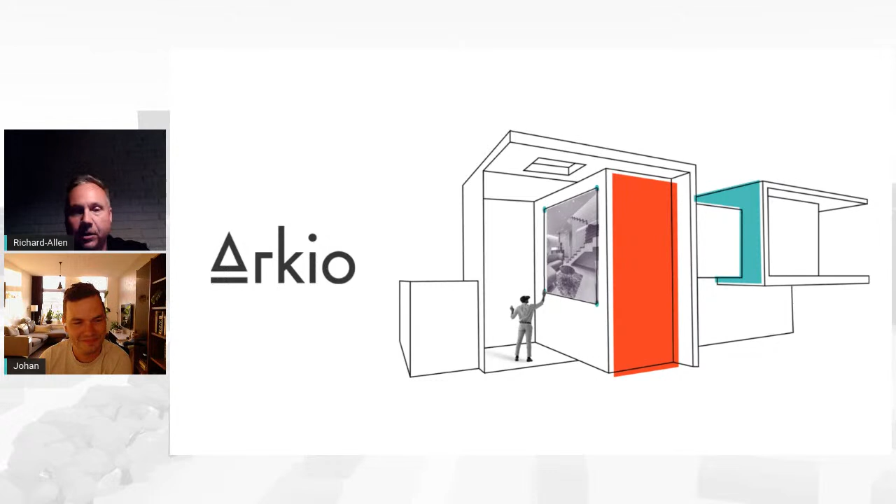Sure, I'll walk through this just a little bit. So a couple of weeks ago, we announced the design competition for Figment HQ to be built out for spatial, built inside of Arkio. Really a fantastic design opportunity for everybody. These were some of the slides we walked through in terms of some of the capabilities of what you can do with Arkio with some of the built-in components, the Unity plugin.

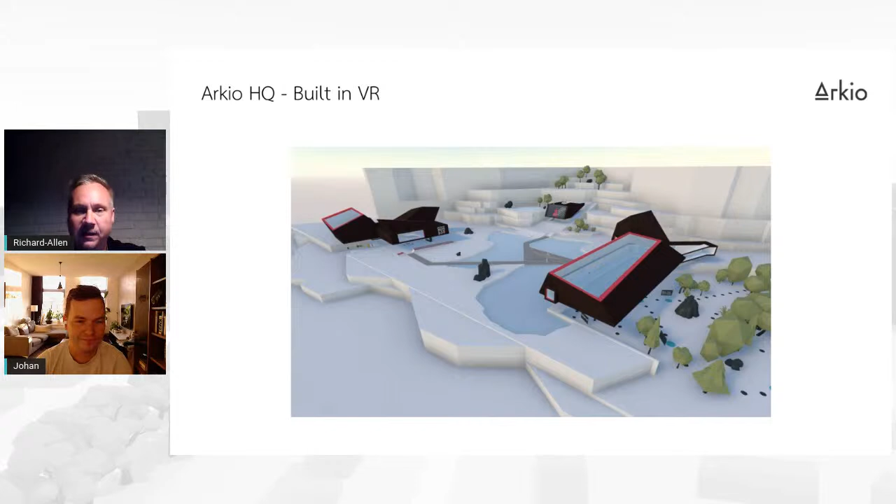Obviously we demoed a bit of Arkio HQ. We hosted an event inside of Arkio HQ, inside of Spatial. I hope a lot of you guys were able to join. If not, the space is still open and live, so feel free to join in. There's some fantastic art exhibits.

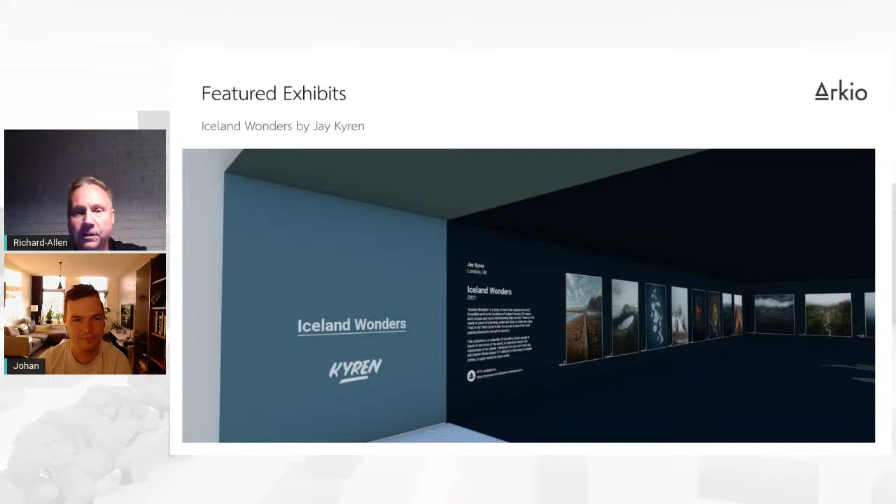This one by Jay Kyren, beautiful photographs of Iceland. All of that is on display inside of Arkio HQ, which is what you see here, live inside of spatial.io. There's the art exhibit by Kyren. We have Pieter Geer Magnuson, he did some wonderful sculptures for Arkio HQ. We've got some user showcase models.

But we made the big announcement about the design competition, Figment, Arkio, and Spatial. What you probably know is the design competition is currently running through middle of August. What you don't know, which I think we can announce - can we not? We can announce it - are the prizes today. So this is the first time this is being announced. Let me pull that up so I can actually get this right.

So first prize is 15,000 US dollar coin in crypto plus an Oculus Quest 2 headset, really fantastic prize for first place. There's a second place prize of 5,000 US dollar coin plus an Oculus headset. There are runner-up prizes, which will include 5 Oculus Quest headsets.

There's a plaque with design credits, and obviously opportunities for blog posts and sharing on socials and all sorts of things. So first time I think we've been able to make that announcement. I think that is coinciding with announcements that Figment is making as well. So super grateful to be working with Figment on this design competition.

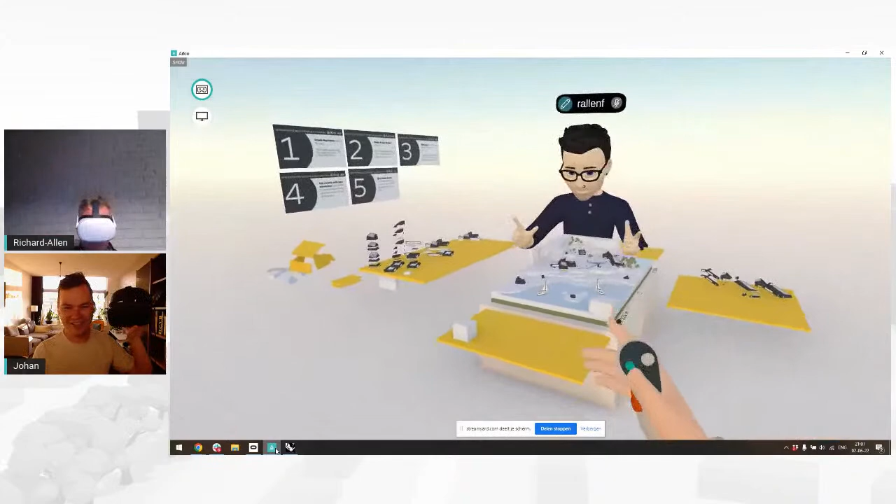Do you see me? Yes, there you are, wonderful. So here we are in the HQ. What are we looking at there, Richard?

So what we're looking at is obviously this HQ model. When you launch Arkio on your main home panel, I'll open that up right here. You can open it up with the main panel. Let me just show the users then. Right there, so you can open up your main panel and jump right into Arkio HQ.

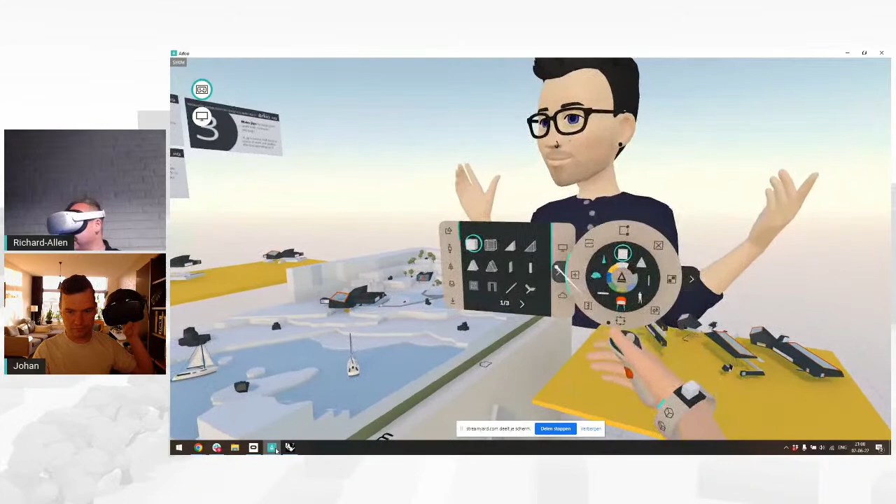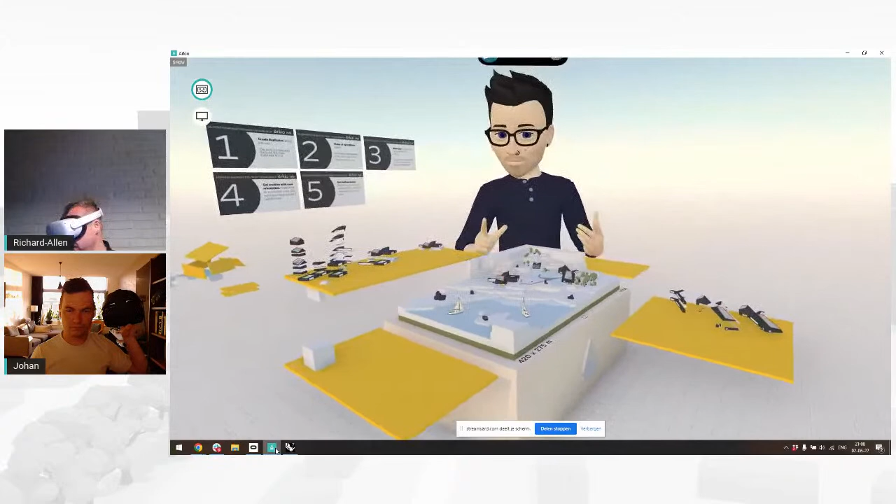Obviously, this space has been - what you're seeing is some of the work in progress for Arkio HQ. I've taken apart some of the geometry so I can show you how some of this was built, some of the methodologies of working with Arkio's unique, intuitive, kind of parametric design capabilities. There's some specific ways you want to work with that, and I think we're going to get into that in just a minute.

I think, Johan, did you want to kick us off with some of the basic building blocks?

Yes, let's do that. So I'm going to be jumping in VR, and I'll try to keep my head still to make it a bit comfortable to watch. But just explaining a bit, going beyond the basics in Arkio: when you're making geometry in the app, you're working with flexible parametric components, and kind of the building system that's in place here. It's good to understand that a bit better so you can make the best use of it.

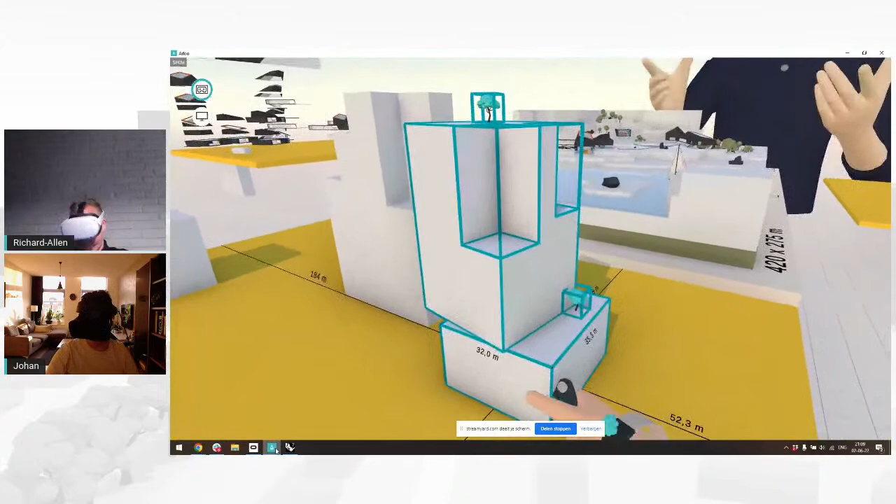So when I'm making solids and subtracting in it, it's all the same. In Arkio, you make either solids or voids by pressing shapes inside of the shapes, and all of the objects that you make behave almost like a physical model. So the best way to work with Arkio is actually using your hands and just picking up the geometry, and you see how it's kind of sliding together, moving and aligning to nearby shapes by just moving them near other objects.

Now these are just basics, but it's good to understand what is happening when objects are glued together like this. So this shape, let me just put a little tree on the top here and here. This shape got all connected at the edges. So when I'm making a volume on another volume, you see how it snaps together at the edges. It means that these faces, when I'm now using the edit tool or my hands, you see how they snap together and move together. So this is the building system of Arkio.

And if you want to move several objects at the same time, this will actually help in your benefit. Sometimes you don't want things to move like this. You can actually twist your hand while you're doing an operation. You can see how the highlight of my controller changes to only move one of the faces. Controller straight, it moves all of the objects on the top, all of the same objects.

You can move the controller with the wrist down to move only one face. And if you do the wrist bent up like this - let me just do it with the other hand so you can see it a bit better - when I move my controller up like this, I can also make only the top surfaces move like this. So you can use this system with your hands to move objects. A much easier way to move things without moving everything at once is you simply disconnect the shapes.

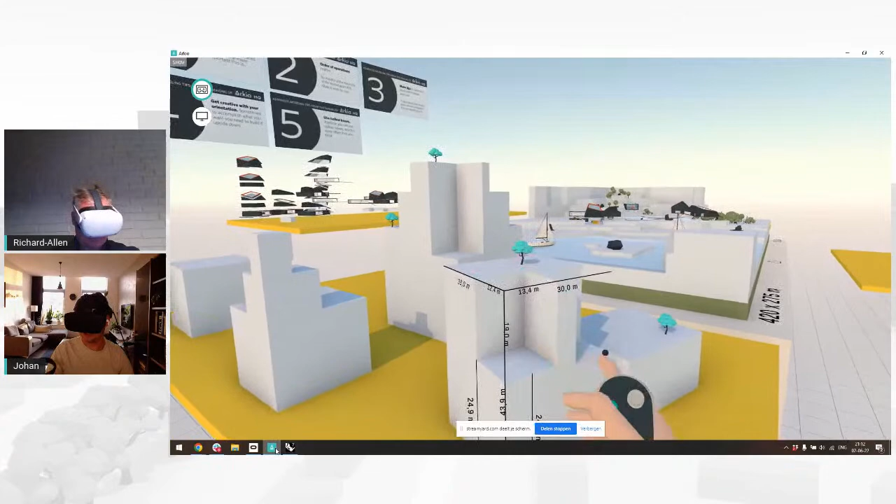There's also some other things I want to quickly show, like when you're making and editing geometry. Basically every operation you're doing in the app, you can also watch your wristband, because this gives you extra options. I could work with orthogonal stretching, which means if I grab this point, it's going to stretch the cube orthogonally. If I switch to free DOM mode, I can stretch the shape per feature in a free form.

Similar different modes are there when I'm switching to a split mode, for example when I'm making cubes, it's splitting the shapes into building floors. And if I cut into those building floors, I can work with tower shapes that have fixed building height.

Now the last quick thing I want to show, but I quickly want to check the timing to see if we're not over.

Can you mute yourself right now, please?

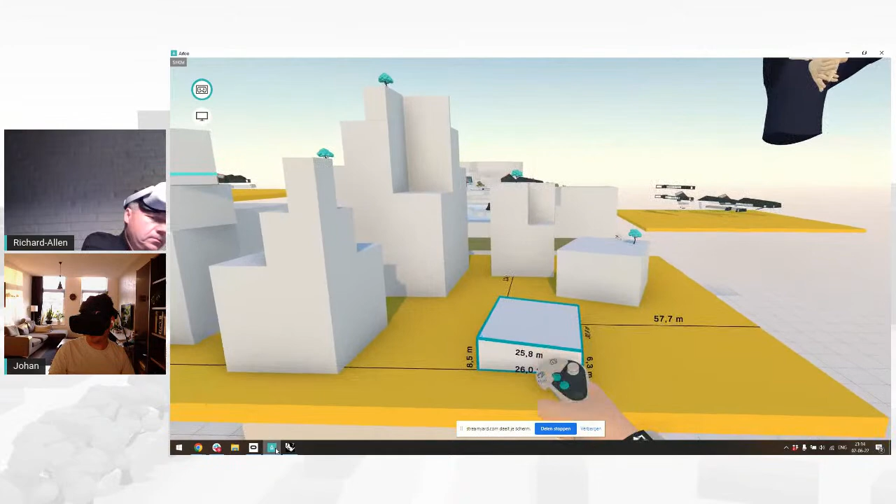So think of this as a block, like if you would make a copy of this block. I'm just trying to get it. So if we have this block and try to make a copy, I'm going to duplicate this in.

You can make the copy, it will snap in place accordingly, and by stacking several of these blocks on top of each other, it will basically make an arc. So these can be seen as building blocks or cubes from your scene.

Let me try to do that as well. I can make arrays of the shapes on top of each other to make a segmented building arch, and this can be used to make more complex shapes with Arkio. So if you want to make more curvy shapes and adjust objects accordingly, you can see how this would give you some extra flexibility when making shapes.

Let's see, Richard Allen seems to be dropping out of the meeting. Are you still there?

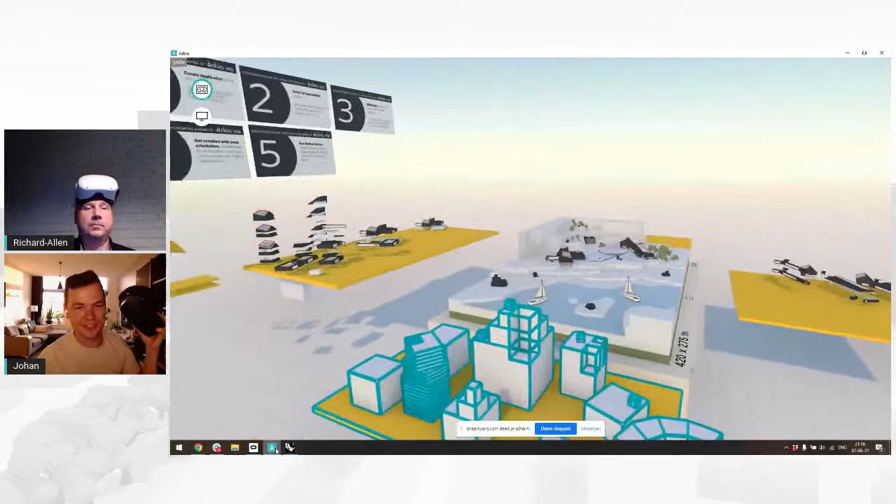Yeah, so I've run into an issue, Johan. Maybe this is okay for everybody to know, but my headset re-updated to the new software version, so I'm not seeing your model inside my headset. I'm trying to re-downgrade to the same version. I think it's probably okay for people to know that sometimes if you're trying to work collaboratively, you need to be working on the same version of Arkio.

Yes, that's good. We gave you access to some developer builds, so it was unintentionally updating for you, but this is indeed what happened now, so your version got out of sync. What we could do is, if you manage to get it still working, you could still show us around in the scene, and I can do the operation for you, so people can still see what is going on.

Okay, let me come back into the room real quick. I was trying to come in another way. We had this working just a couple minutes ago, and then while I set the headset down, it updated itself. Oh yes, nice, love it. Okay, give me just a moment, I'm coming back in the room.

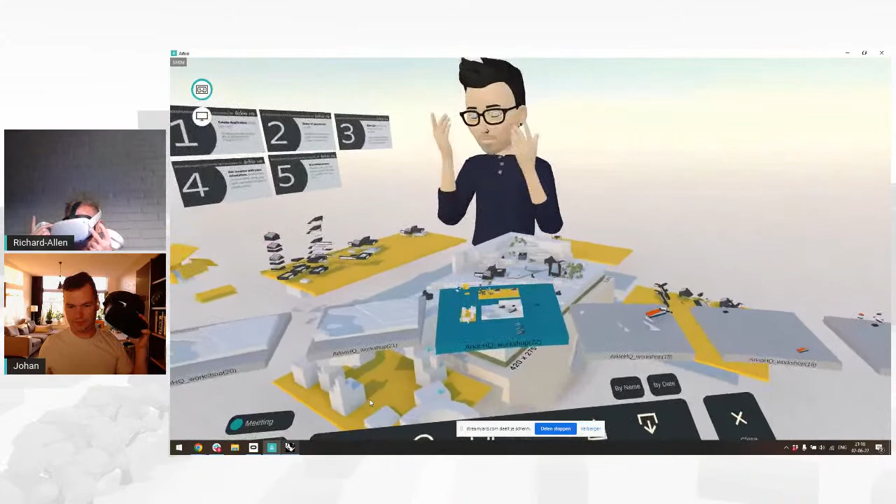Okay. Yes, I think that's fantastic. And I think what I was going to try to walk through, and we'll see how much I can do. So you can see me. Yeah, I'm watching myself on screen. We'll see how much I can interact, and you can see me interacting with things.

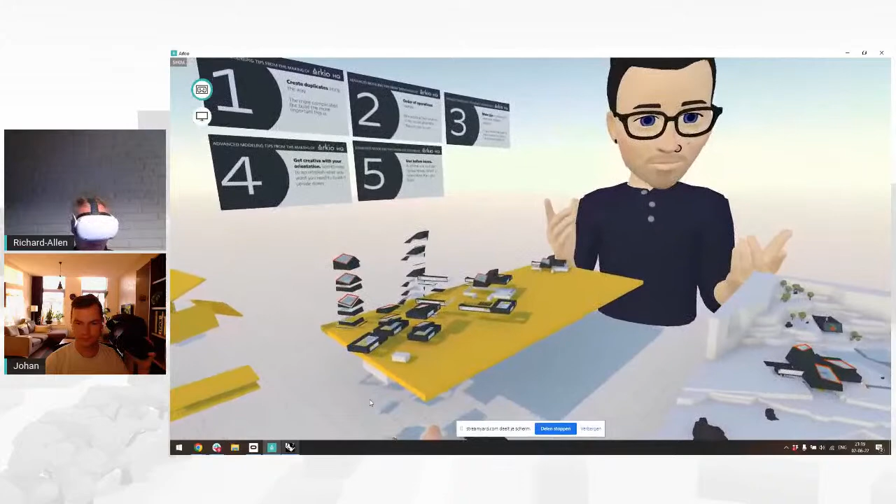I really wanted to talk about, I guess, five points that I learned in building Arkio HQ that I thought would be really advantageous for all of you in getting in and building with Arkio.

So the first one is pretty basic, but it is so very important, especially when you get in and you start building with really complicated geometry inside of Arkio. And that's this idea of creating duplicates.

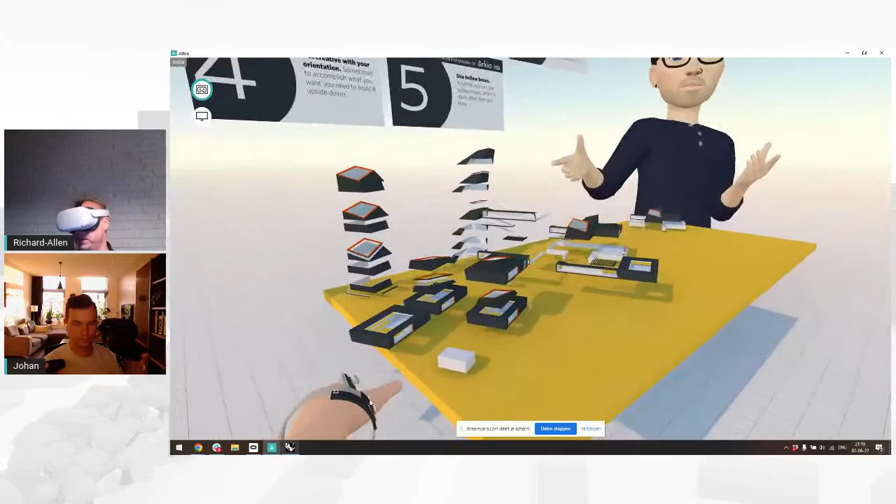So what you see over here on this table is a lot of how I built Arkio HQ. As I would build different components, I would create a duplicate and then start working on that.

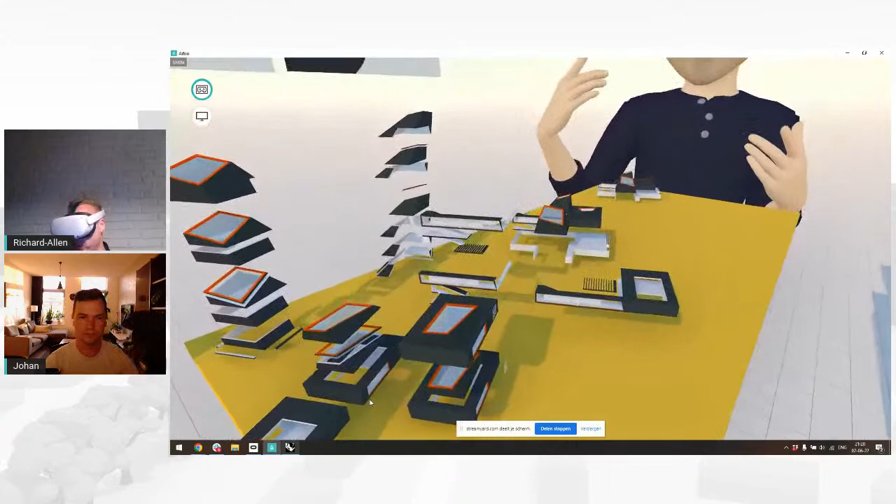So in doing that, you are oftentimes going to break geometry. I have broken a lot of geometry inside of Arkio when I was building Arkio HQ. Some of it is just the nature of trying to kind of figure out how to build something. And you want to be able to go back. Sometimes undo doesn't get you where you want to go. And sometimes undoing, you'll end up losing work that you don't want to lose.

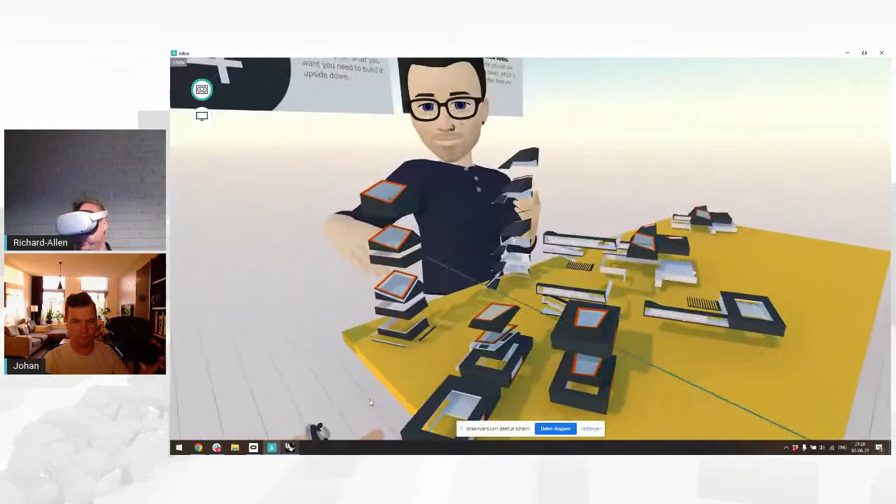So I find it extremely valuable to create a series of breadcrumbs for yourself. And that's what I've done. As I build Arkio HQ, I built it with a series of breadcrumbs that I could always go back to a previous state and work from that, or bring that back into my workflow and continue going. So it sounds basic, but it is extremely important. It will save you a lot of headache.

The second idea is order of operations. Let's see, it's not going to let me move this. So that's one of the things that I don't have—I can do it for you.

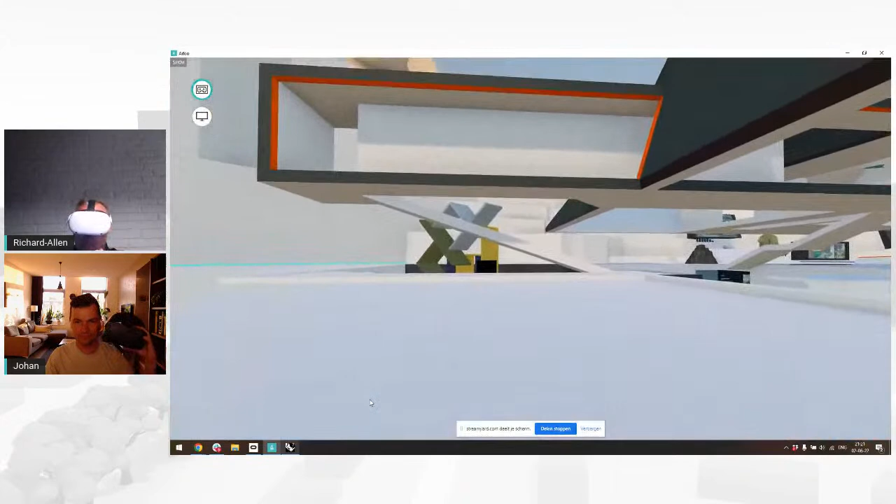Okay, so yes, order of operations. Johan talked a bit about how the geometry is hosted and how you can move things. As you start to build really complicated geometry, I think it's really important to think through how you are hosting things in a very intentional way, because you want to be able to move things out of the way and basically treat an object as a full object, right?

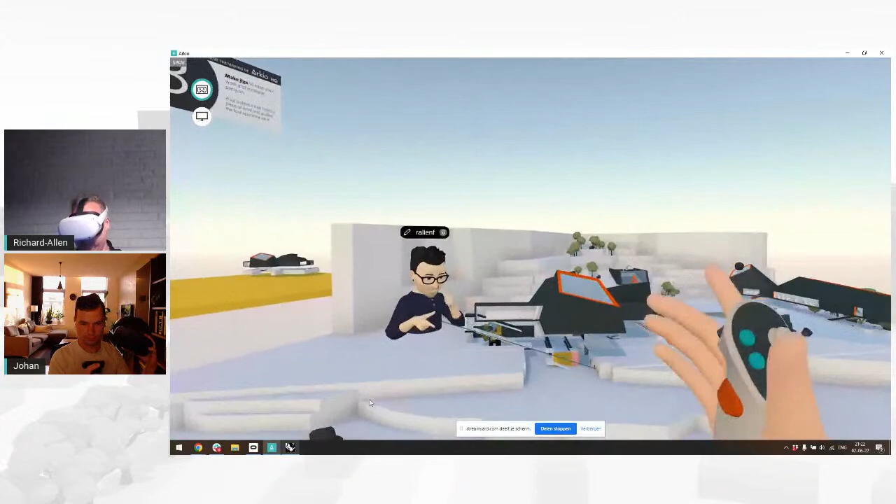So here you see kind of a bit of the pieces that goes into making the gallery building inside of Arkio HQ. Johan, if you will grab this spot right here, this landing, all of the HQ gallery building is hosted on this single landing, because this was the point in which I could locate it on the site model. So it's very easy for me to kind of pick this up and bring it back and leave the whole model kind of connected together.

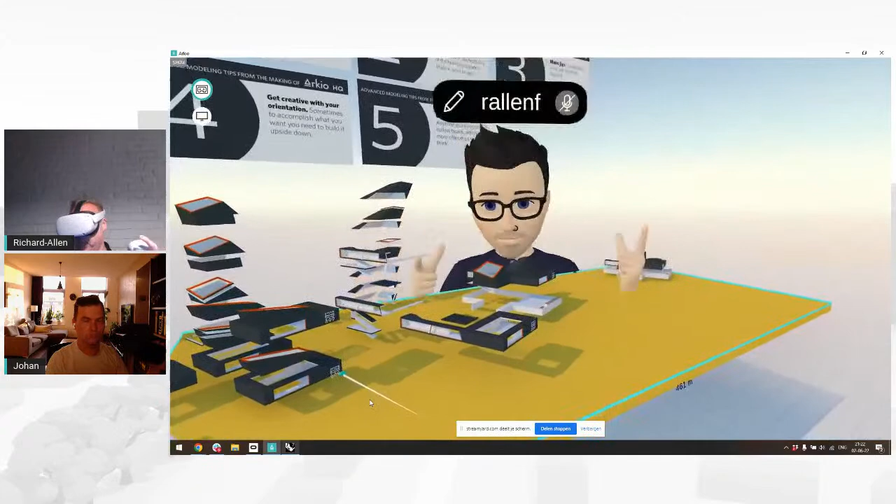And there's a series of hosted geometries, right? So within that point right there hosts the entire model, but there are a series of smaller pieces hosted on top of that. And each of them have a control point that I intentionally kind of placed. And some of it's trial and error. You kind of build something and then you go back and realize, okay, this is the way I need to connect them. This is my order of operations so that I can disassemble and reassemble things. So that is my number 2 tip, really, really important for building complicated geometry inside of Arkio.

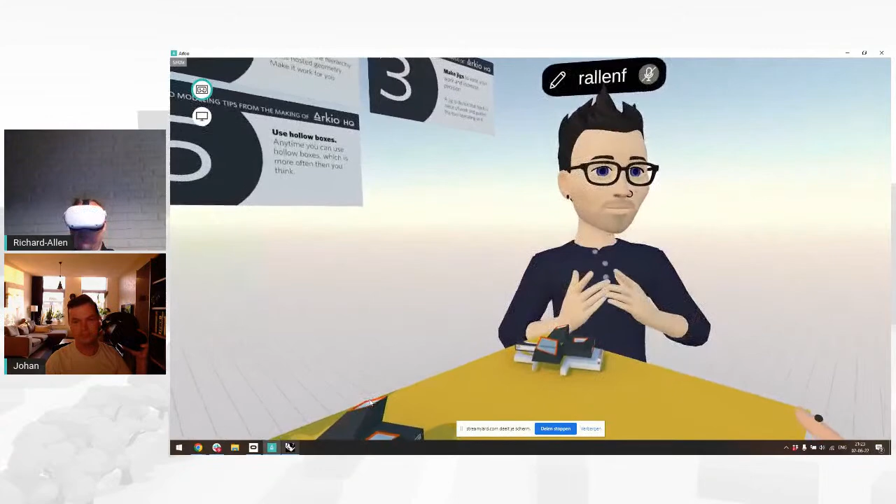The third tip goes back to what Johan talked about, building with your hands. You're building inside of Arkio like you would build a model by hand. For those of us who went to architecture school or have built things in a wood shop, you get used to building jigs. You build yourself tools that help control the geometry. So that is my third tip: make a jig.

When you figure out the geometry you want, you want to be precise. I'm an architect, I like things to be really precise, to be really specific with the way I build and the way things come together. So over here, in this yellow area, you see a couple of the types of jigs that I built.

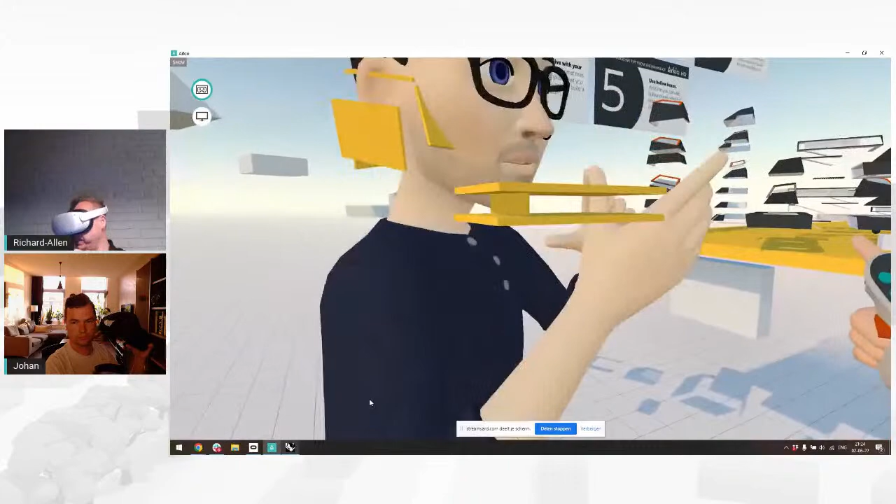These jigs were specific to the gallery building in Arkio, and I've built a number of jigs throughout the process, but these here are specific to the gallery building. This one that looks like a sandwich was a jig specifically for making sure all my walls were at the same height, I think 10 or 12 feet. It corresponds with this slab building right here, so everything within that zone I wanted to be exactly the same height.

I would use this jig and smash my architecture, like I'd build a wall and slide it up there and smash it into that, just like Johan is doing right there. That's how I was able to reproduce the geometry over and over again. A lot of this goes back to the way I would build a physical model in architecture school, building myself the tools that would make that work easy and reproducible.

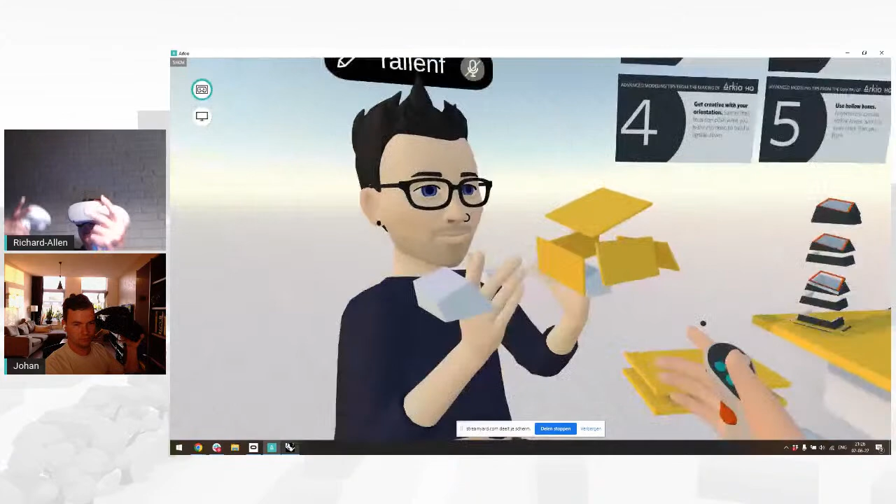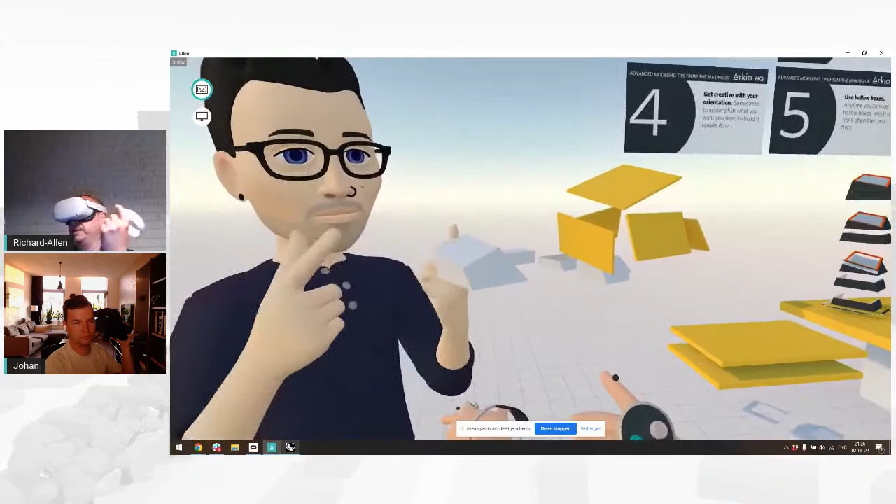So that's making a jig. Another type of jig I would make, you see right here, I've got these angled walls. I really wanted the skylight oculuses to have an interesting shape that was looking up towards the sky. It was inspired by a couple ideas: one, the volcanoes of Iceland, hence the dark color and general shape. It was also about creating skylight moments looking up towards the amazing aurora over the skies of Iceland.

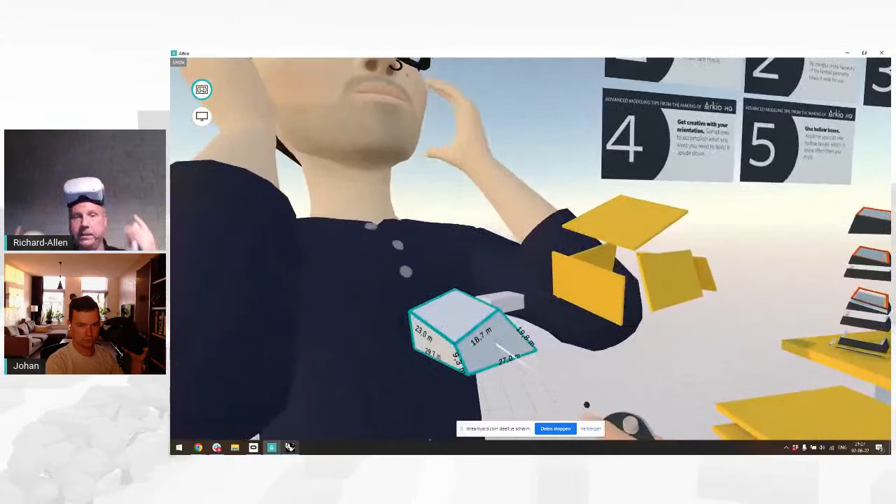So I really wanted that to open up the galleries to the night sky, that was part of the inspiration. How would you build that, and how would you make it really reproducible? What you can see here is I started with a hollow box, which is really getting into tip number 5, but that's okay. I created a hollow box, let me see if Johan is doing that. Yes, and then with that hollow box, I can walk you through this, Johan.

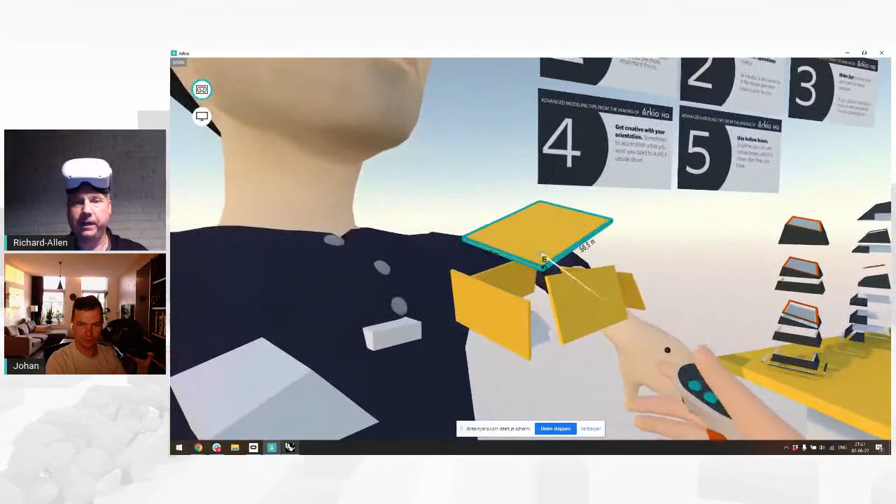So if you build yourself a hollow box, maybe just on one of the yellow platforms, you've got an empty hollow box with 5 sides to it. I would build it maybe on one of the flat ones. If you pull back just a little bit, maybe on top of that jig, build yourself a hollow box right there. If you take that hollow box and move it inside the jig, so it's just sitting inside.

Now edit the walls, edit one wall and smash it up into the roof, like this, and the other one too. The one thing you do have to notice, what's really important doing this, is that the shape you're smashing into has to be bigger than the shape you are smashing, so you almost have to be kind of smaller. But that shape you can now smash into those walls and get that open, hollow volume with some interesting angles to it.

So basically what we're seeing here, this gives me the shape inside, just using that little jig that was made. We have that very specific shape, and you can see from the inside it's actually a hollow shape. So this is how you made most of those elements, right? You kind of forced the geometry to follow the exact planes you already set.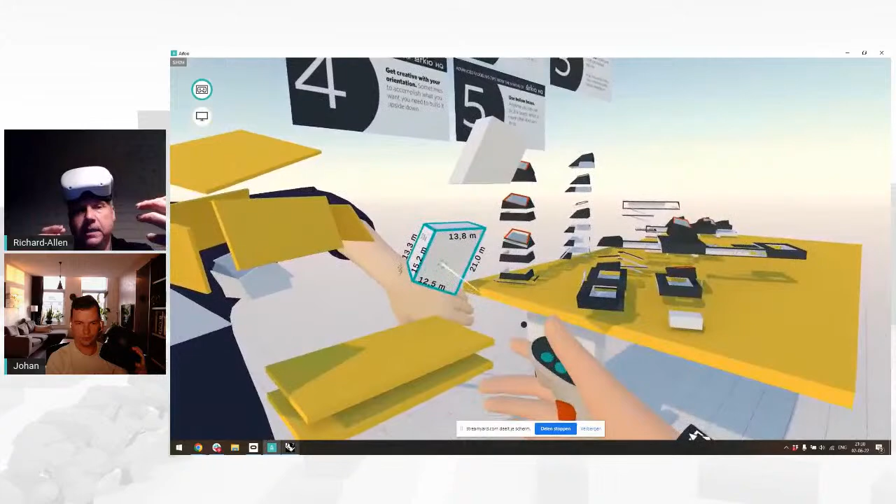So you need to turn your model around, right? If you look at this, you might want to slice it at an angle. That's exactly what I did when I cut up those skylights - I'd slice them at an angle. I built myself a new jig that would allow me to rotate the model at a precise angle, and then at that angle I could slice that geometry. Then you build yourself a number of jigs so you can bring it back.

And put it in the original orientation. So it's something you have to think through - you have to think a couple steps ahead when doing some of these processes. You need to be able to rotate the model, slice it, and then rotate it back to where you want. But what you find when you do this is that the geometry is precisely built and lined up.

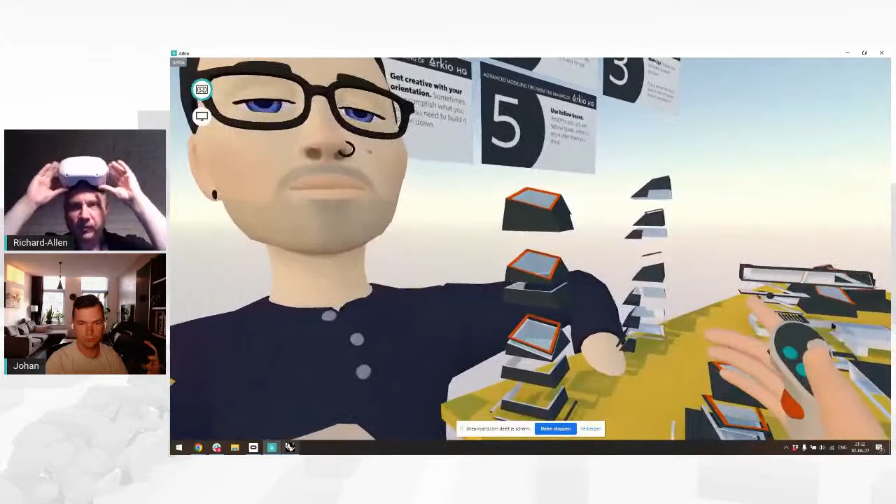So you can then take, for instance, this piece right here - I don't know if you can see me. I've taken this top piece, this was sliced off the whole. This lower portion I rotated 90 degrees, sliced off the edge, because that's the portion that actually engages with the art gallery. The rest of it is kind of an oculus. I'd sliced off the very top, so I got rid of the top box, the lid for the hollow box, and then I sliced a tiny little sliver off of that, and that's what becomes the red ring.

So it's a series - it's one piece of geometry that I've sliced a number of ways and reassembled. And then when you put it all together, it all lines up precisely.

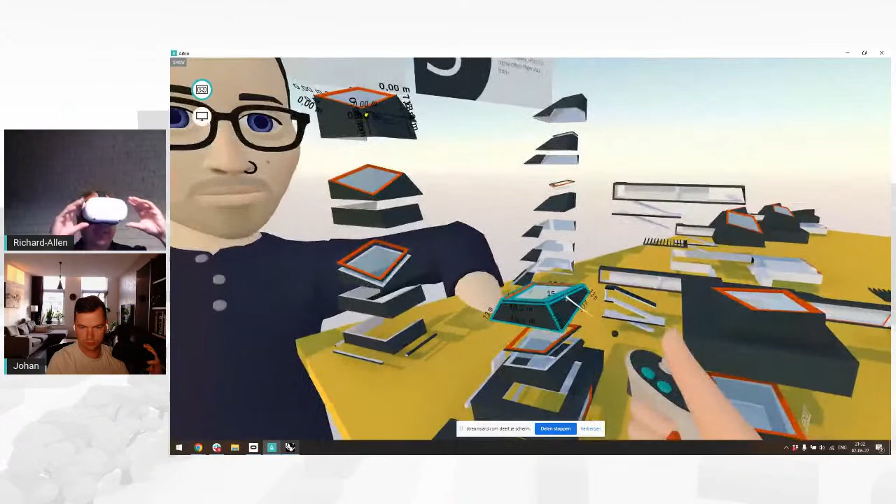I think for me this was one of those tools that became really, really advantageous - the hollow box, so that's tip number 5. I use the hollow box a lot. I find if you can build it with the hollow box, your construction is going to be better in the end. You're not going to have a lot of times when you're building and the way it hosts geometry, where you carve away and end up not being able to place something in a spot that's been carved.

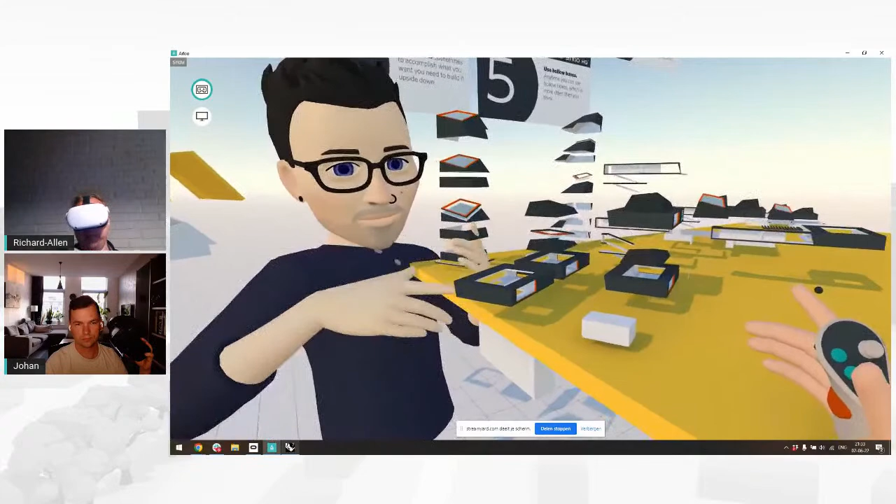So if you build it with a hollow box, it's a whole lot easier. I want to point out where I've built hollow boxes. All of the skylights started as hollow boxes. This volume right here, which was the main rectilinear box for the gallery, that is a hollow box. It's a hollow box that I sliced off - actually I built it vertically, then rotated it 90 degrees, and sliced it at an angle. Then you come in and start carving out of that. So fairly simple, basic hollow box.

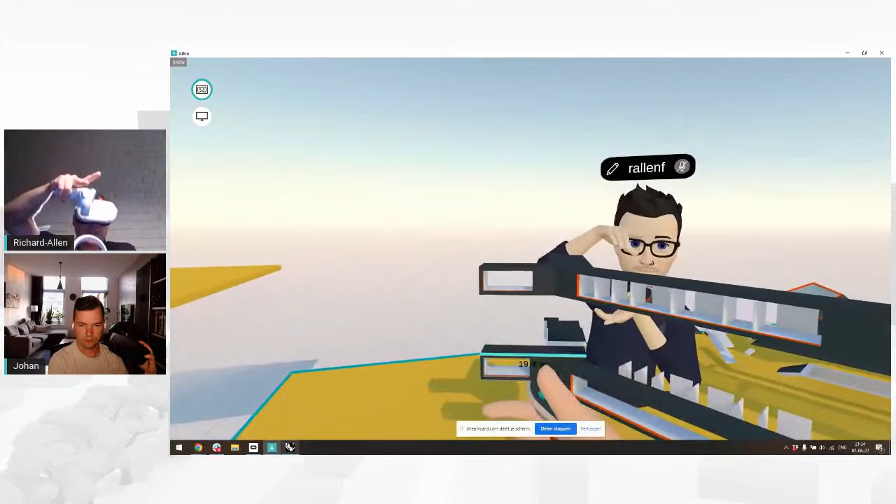If you follow me over to this front table, a lot of the geometry for the learning center were hollow boxes. The top, obviously, the skylights again were hollow boxes. All of these elements that protruded out and created office spaces, meeting room spaces, and those sorts of things, those were also hollow boxes. Those were hollow boxes that I had created a jig for so I could make sure they were all the same height, again 12 feet, so they all lined up exactly perfectly.

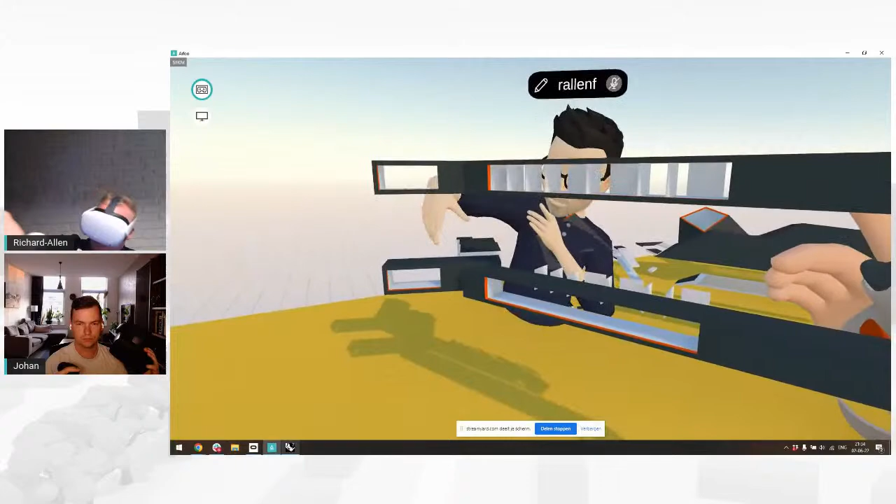And then just by creatively slicing off elements - this box right here, I had sliced off two sides. This one has multiple sides sliced off. So it looks like at the end of the day this is just 3 walls or 3 planes, but it's actually just a hollow box that I've cut off multiple planes of.

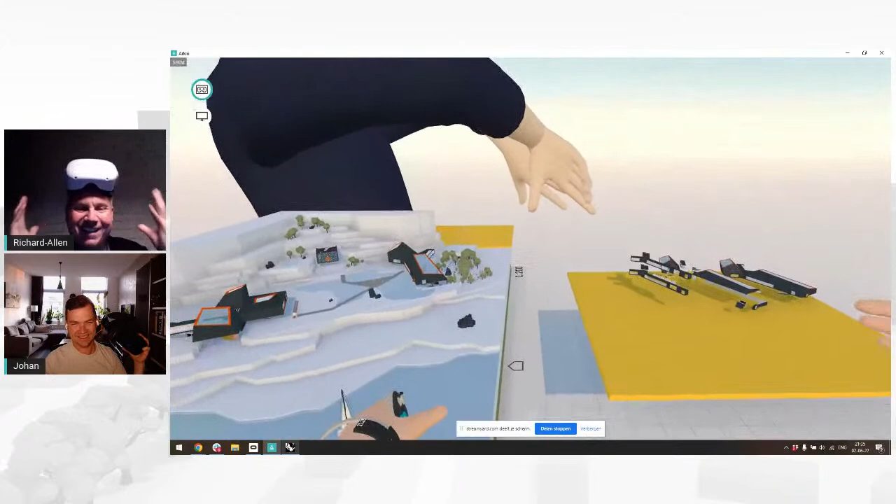And it's more stable, less geometry than if it were 3 separate planes. I think those are the biggest tips that I wanted to share with you that I learned through the process, which made my workflow a whole lot easier. I appreciate Johan for building along as I walked through it. Hopefully it's made some sense.

Are there any questions? I think it's very good to show what you were talking about with these boxes - they use Arkio's parametric nature very well. You can see how the geometry still stays flexible even though the walls stay the same thickness. So you could really use this to make more sculptural slabs like this, still with a fixed wall thickness.

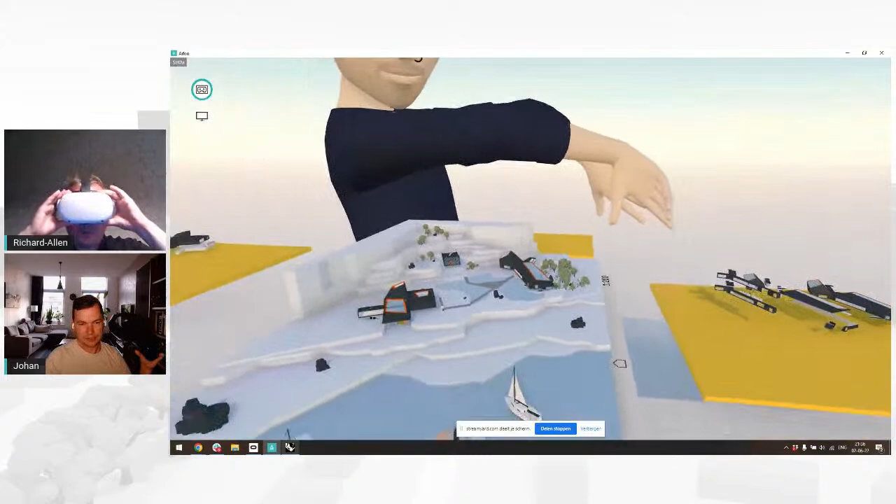So tips 4 and 5, let me go back and look. Tip 4 was being creative with the orientation. Sometimes what you want to build, you need to build upside down, or 90 degrees from top, so that you can use the slicing tool. Just because the slicing tool only cuts horizontally doesn't mean it can't end up cutting something at a funky angle - you just have to build yourself a jig to do it. Think about using a table saw: the blade only usually cuts one way, but if you build yourself a jig, you can cut that geometry any way you want. That was number 4, be creative with your orientation.

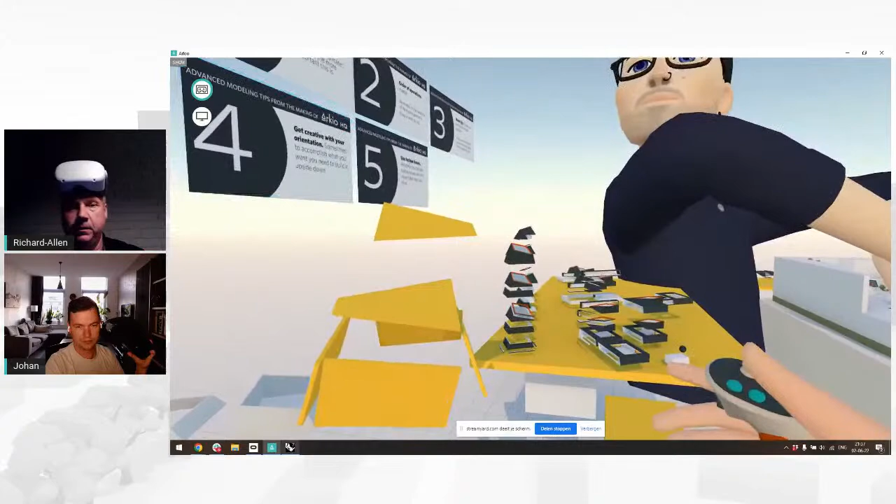Know that sometimes to get what you want, you have to think about it a different way. Number 5 was using hollow boxes. As much as you can, if you can think through how to use a hollow box, that would be my biggest recommendation, because it simplifies the geometry and allows you to nest other pieces into it a lot easier than if you start carving it away.

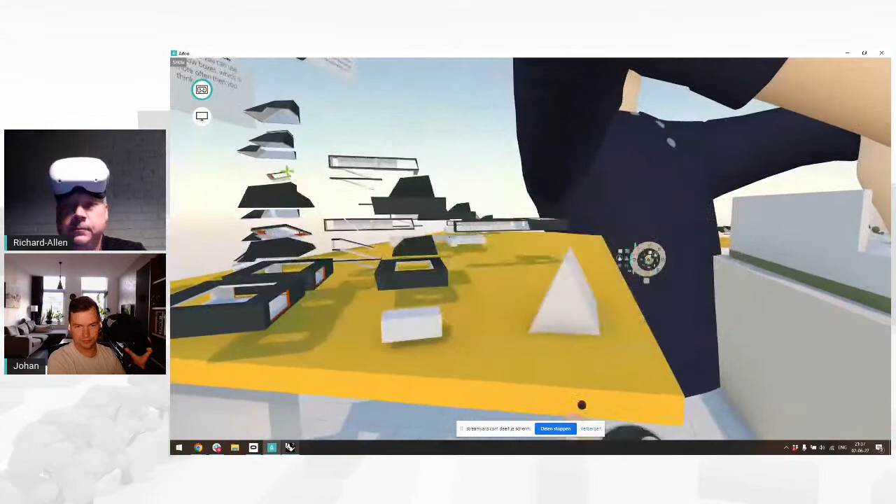Some other tips I can give, maybe while you look for questions about the steps - if you have an Arkio solid geometry, sometimes when I'm making a shape on another shape and dragging it in, it's not orienting the way I want. I want to cut a triangle in this triangle, but it's orienting the wrong way.

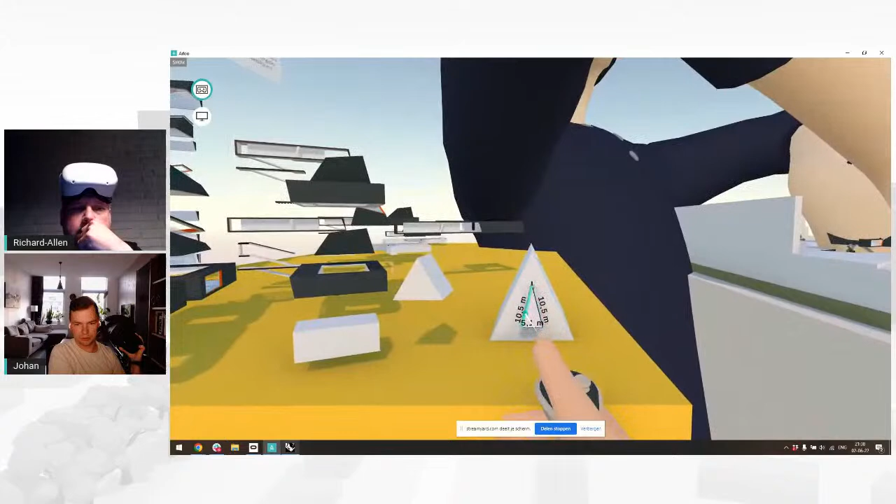Also adding to that tip of orientation, the rotation of the shape can still be adjusted. You can pick up that object and use the edit tool, and maybe some jigs, to make it more precise, forcing that solid shape into a hollow shape. So you could use any starting shape you have, just make it a solid, and convert it to a void by pressing it inside of another solid shape.

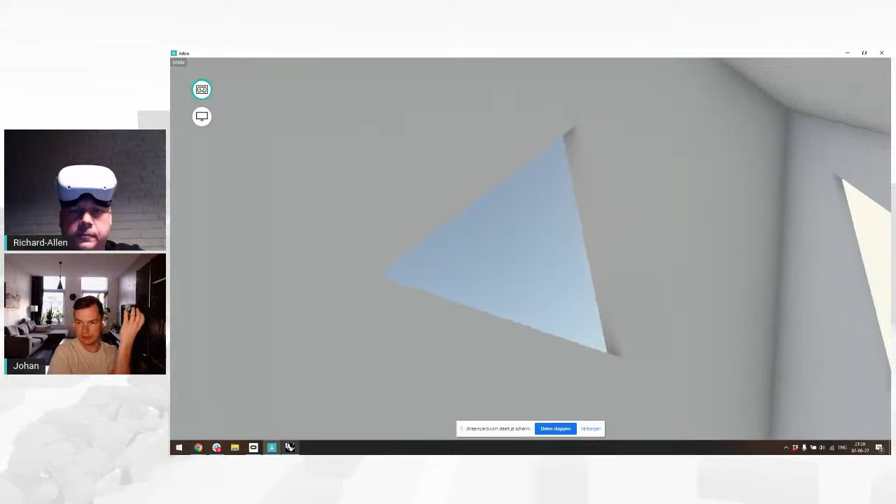So here again we see the advantage of the hollow shape - it stays parametrically with the same wall thickness. I can jump inside of this space and really see what that space will already look like. So you can imagine, with some simple primitives, you can already build some pretty interesting, architecturally interesting spaces.

In the meantime, I can check some of the questions as well - do you see some questions, Richard Allen? There's one question about a recent update in camera jittering. Is that something you're aware of?

We are using application space warp with Arkio - I don't know if you're familiar with some of these techniques, but we're basically rendering at half the frame rate. Typical VR apps run at like 70 or 90 frames per second; we run at half the frame rate. So we have more computational power to load bigger models and have more space for our rendering engine. You might sometimes see a bit of jittering on things like your avatar - if your avatar goes out of sight, you may see jittering, and there are also some artifacts with the UI. We're aware of these issues and trying to fix them in the next updates. But if you see very specific issues with jittering or uncomfortable experiences, please let us know, because it might be related to this application space warp we're using, and we could look into finding a solution with you.

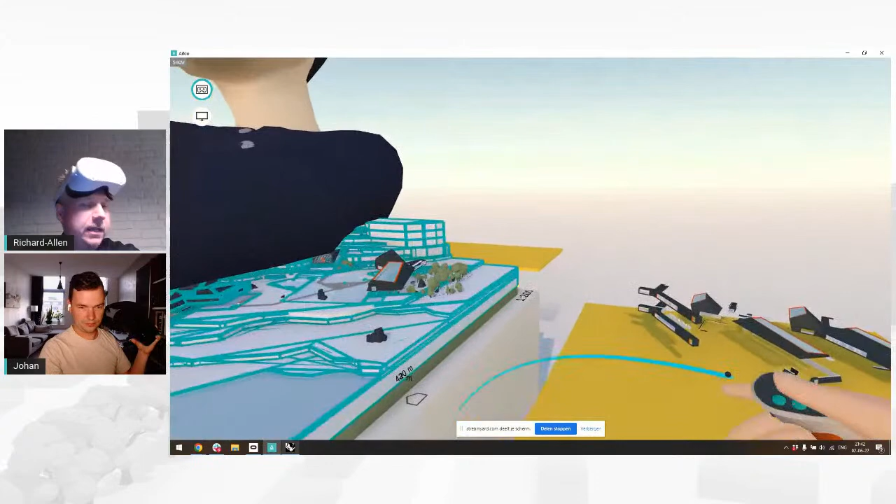Diana, you asked a question about publishing in Spatial. We did a webinar about two weeks ago, live from inside Spatial, where we talked about that process. You can export directly from Arkio to a GLB file, and that file will import directly into Spatial. So it's super seamless if you want to go that route.

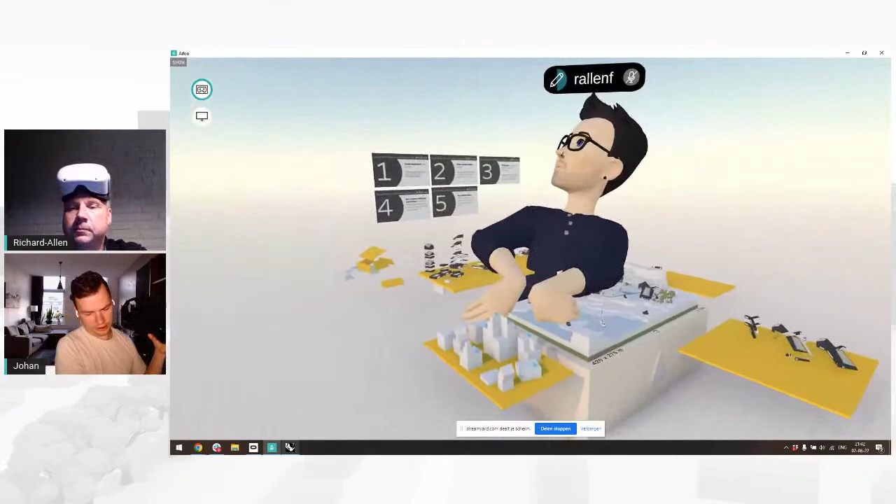I think we have a recording of that, and we can share it again on our Discord if it's available, with some of those tips and processes. We have a basic introduction, or the basic steps needed to get things from Arkio to Spatial, on the Arkio website in our support page. That's where you can find the steps to take something to Spatial with minimum effort.

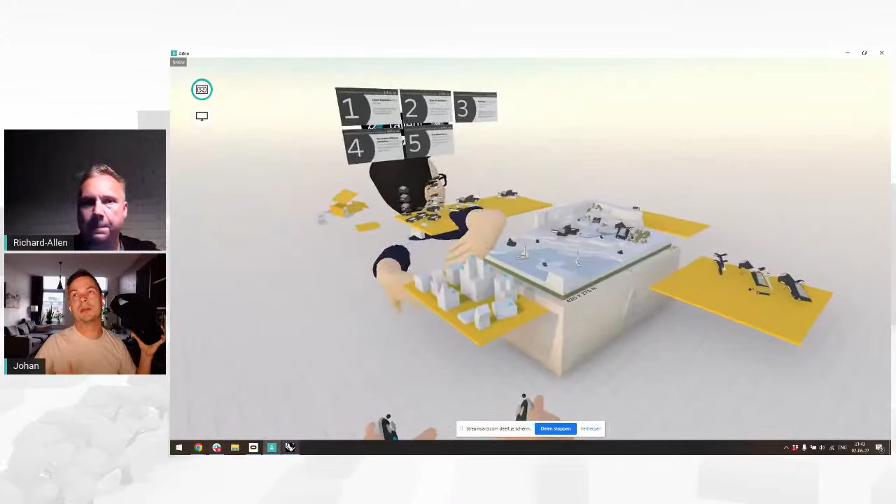We are also going to document a bit more some of the additional edits you can do to make your scene look better in Spatial with some light baking. That will be coming in the next few weeks where we'll add more info. Also, the guys from Spatial have really interesting help pages on this, some video tutorials. I definitely recommend checking Spatial's website if you want to get into light baking and more of the scene preparations outside of Arkio.

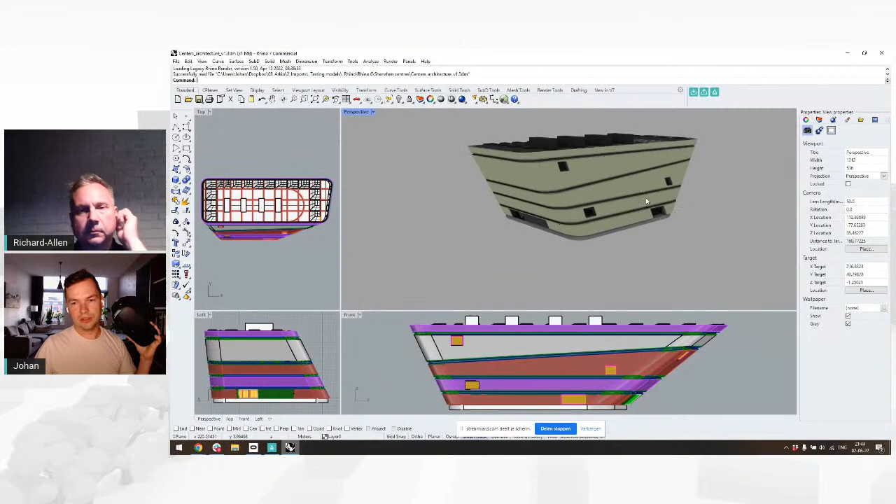Also good to mention, for the design competition, we of course recommend people build things in Arkio, but you're not only limited to that. You can use other applications - we have a Rhino integration plugin where you can export your models to Arkio, and we have ones for Revit, Unity, and SketchUp. You can use this to bring models to Arkio, and then from Arkio it's pretty easy to place those models.

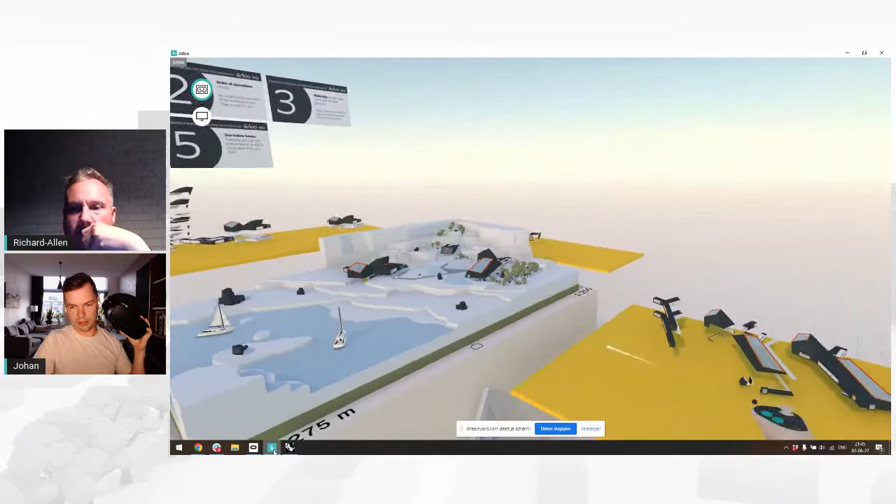If you're on a Windows device like I'm using here, it's just a matter of running those plugins and then finding the file you want to place in your import placement folder. In this case I have this Rhino file, and you can either place it at the origin, which keeps the origin of the original 3D file, or place it as an object. Then you can place that object anywhere in the scene, and it will behave a bit like other Arkio objects, like this tree for example.

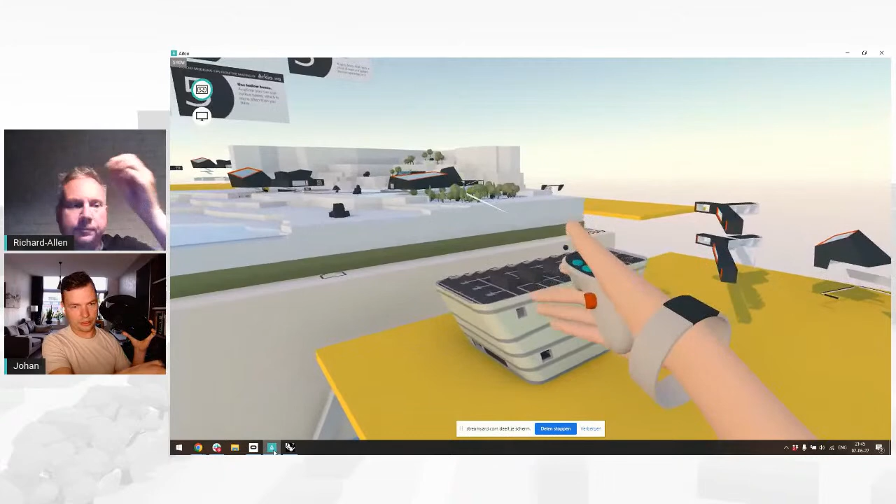The advantage of bringing in geometry like this is that you can actually model on top of that geometry. You can place objects on the facade, and on top of the geometry. You can teleport inside of that geometry - it's a bit tricky to get it, but we're almost there. So you can teleport on top of this geometry, and do the same operation inside, adding decoration or Arkio shapes and surfaces to the geometry.

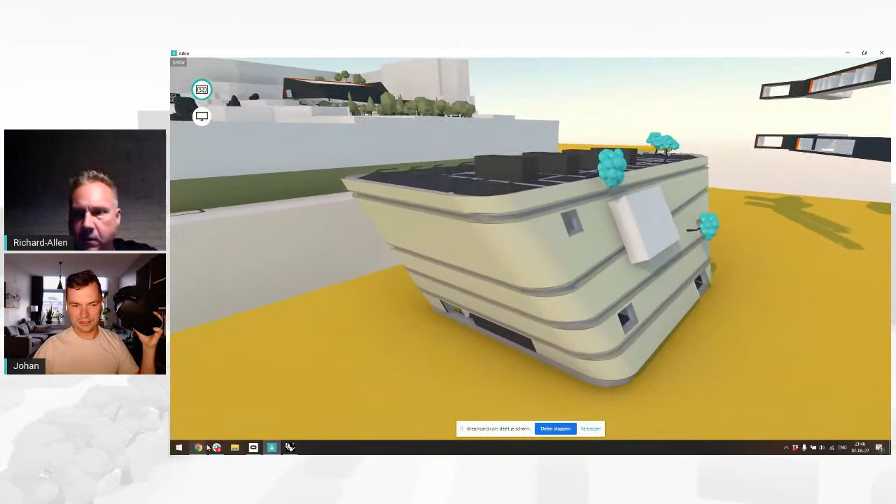I've lost your audio, Johan. Is it just me? Could someone comment if that's just me or if everybody's lost Johan's audio? You lost my audio? Can you still hear me now? Let me quickly check - is it good again now, or not?

You're not hearing me? Okay, let me quickly try one thing. Let me see if we're still live. It seems like people still hear me. That's good. I think it was my internet in Florence.

So I'm going to be sharing my screen again because it's more fun to see Arkio, right? Yes, it is.

So when we have geometry that got imported into Arkio, let me do that step again. You can just place it as an object, place geometry - oh, that's two models, you only need one. You can create geometry on top of that object, and you can place objects on it. When you pick up the original 3D shape, everything still gets glued on top of it together. So you could include any other 3D model in your Arkio creation process, jump on top of it, work on top of it, add things on top of it, and still work with the same principles you got familiar with already when using Arkio geometry.

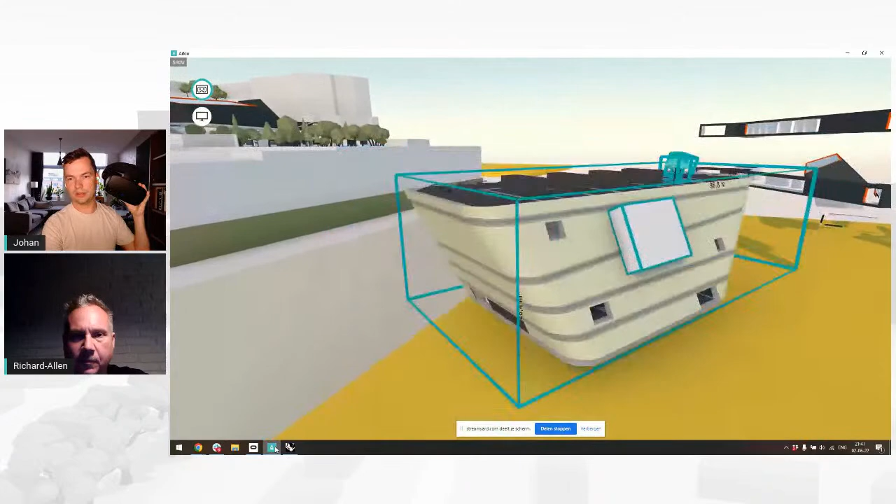Diana, you're asking a couple questions about the competition and the submission for the HQ. There will probably be a blog post coming out within the next couple days, next week at the latest, that will detail out the submission process. It will reiterate the prizes we announced here earlier. I'll highlight a couple things.

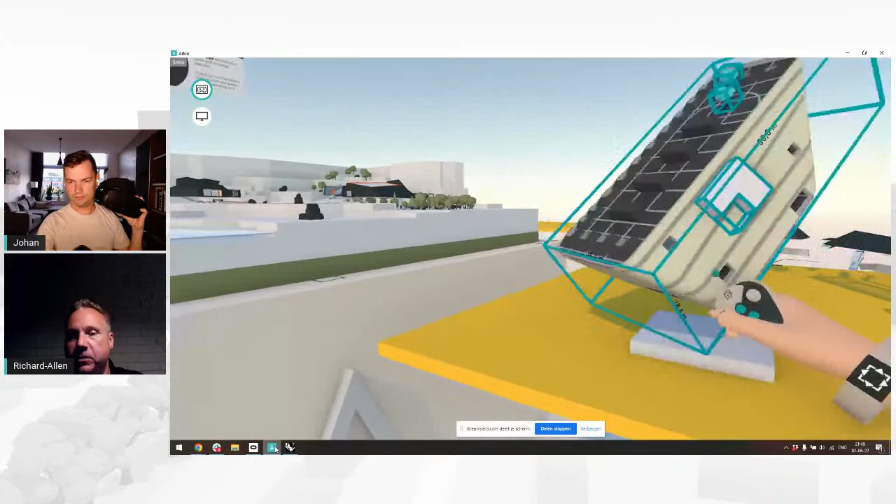Mid-July, we are hosting - this is really to encourage everybody to get in and get started - an opportunity for you to pitch your pre-design ideas, so that the jury and Figment can potentially respond to what you're working on. I think that's a really great opportunity and a good reason for people to get started early. It gives you a chance to potentially get some feedback before your final submission is put together. So that will be mid-July.

The other thing I would really encourage everybody to do is join the Arkio Discord channel. That's where we will be publishing a lot more information about the competition as we go forward, in concert with both Figment and Spatial.

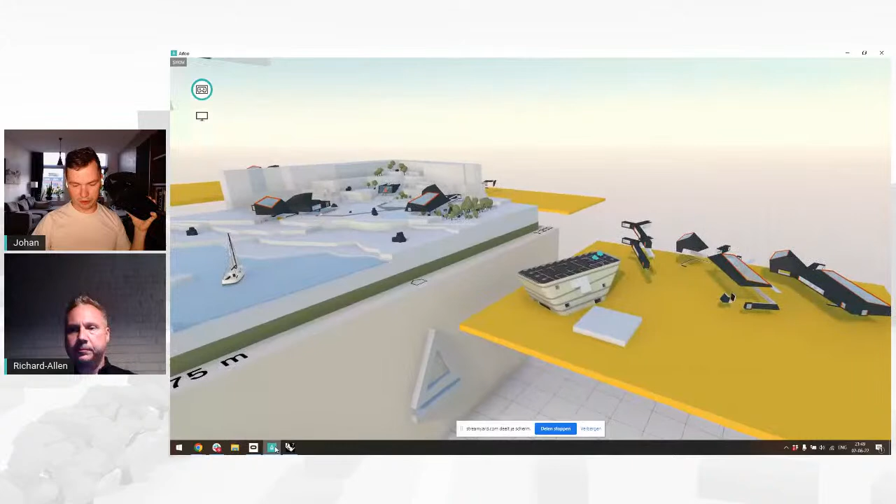It's a very good one indeed. There's still some details that we're ironing out. There will be more details following, but this deadline is still pretty far off from now.

So this gives a good time to get familiar with Arkio, like inviting some of your friends to also try it out, to load in creations from other 3D apps, because you don't have to start from scratch on everything in Arkio. You can load things in there and work on top of these models to get yourself a bit familiar with working with virtual physical models. And there is a lot to learn.

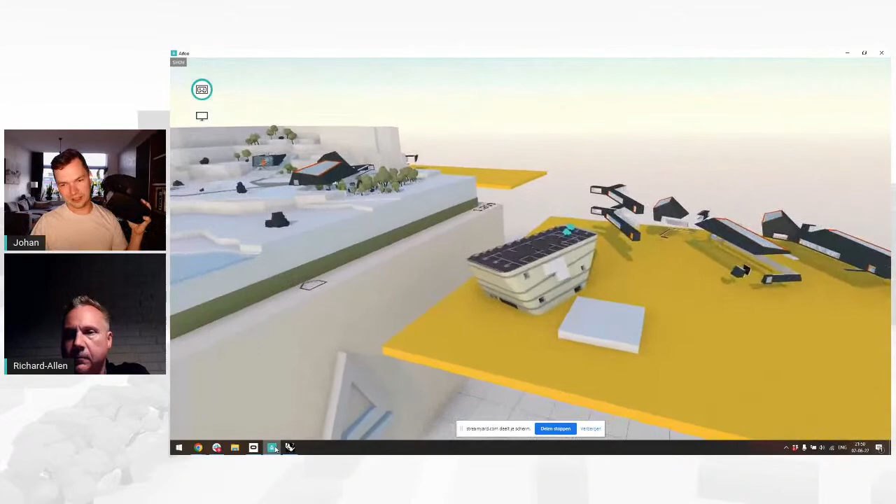The tool itself has a pretty simple user interface, but there's a lot of underlying usability in some of the behaviors we showed today - the geometry, how it parametrically connects, how it can be edited using small rigs, how you can use the tools to your advantage, like Richard Allen described. So we definitely recommend spending a bit more time within the app, and giving us feedback if anything still feels like it's not working well, or if you see, for example, the jittering someone described - please let us know, and we'll try to solve those issues.

Did you spot any other questions? Yeah, there's more questions in here. Forgive me, I'm not sure I'm going to pronounce this correctly. Not even sure how I would pronounce it. That's how I would probably pronounce it. Maybe so. I apologize if I've mispronounced that.

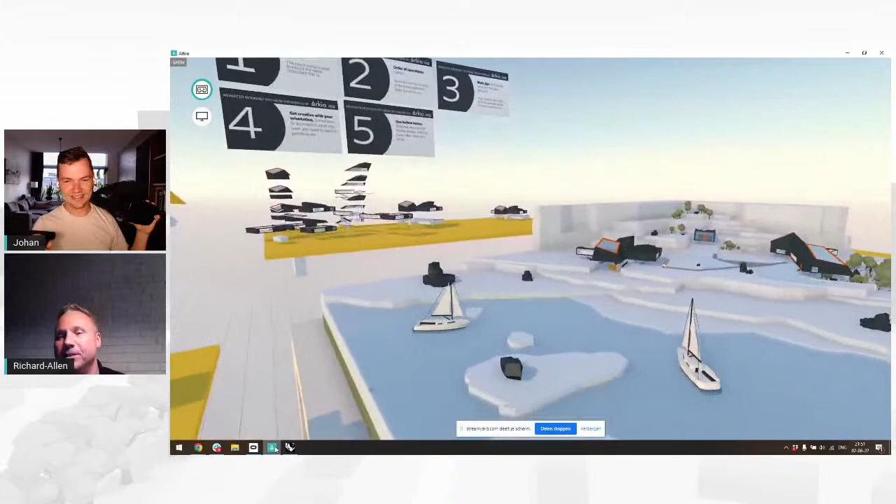You're asking about the size of model and how big that model can be coming into Spatial. A lot of that is documented on Arkio's website. Johan and I contributed just a little bit, but Johan put together a great blog article walking through some of those details. I think it's 250 meters by 250 meters, which is what we determined was the size inside of Arkio that you could build the table to bring into Spatial.

You'd asked about the polygon count, and yes, that is going to be an issue inside of VR with today's current technology. So be smart about how you build to minimize the number of polygons. This model has quite a few polygons. I was able to bring this in its entirety into spatial, with textures added. I cleaned out some polygons you'll never see, like the backsides of the mountains, just to make it a bit more lightweight.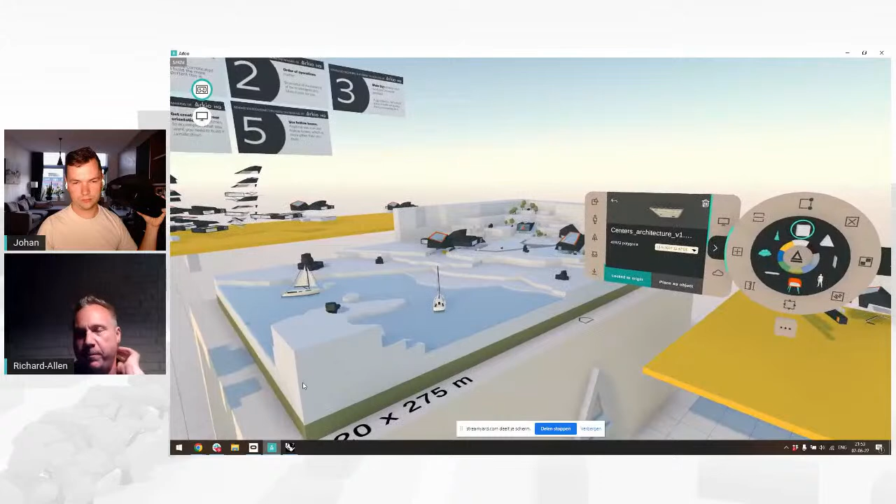But most of what you see here comes into spatial just fine. You are going to run into a limit on file size - I think they say 50 megabytes, though I find a little less tends to work better. You also run into issues with size in terms of meters, the space it can generate, as well as number of polygons. So there's really three different things you have to balance when bringing models into spatial.

I'd like to add, if you keep your geometry mostly in Arkio, it's not going to run out of hand that fast, because the geometry is plane based, so the polygon numbers will be relatively low. Even with double faces, the polygon count would still be low. But what you have to be cautious about is adding a lot of props - for example, if you added thousands of trees, those will add up. Also the things you bring into Arkio, because that's in your control, how heavy these models are.

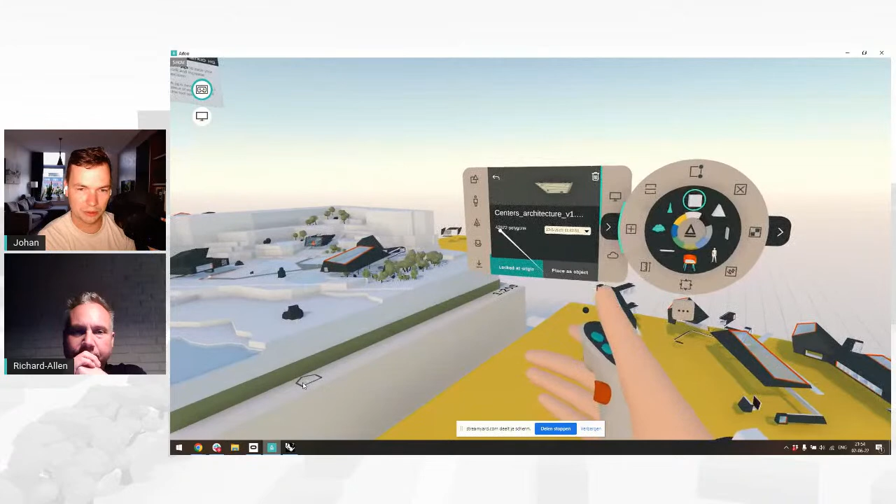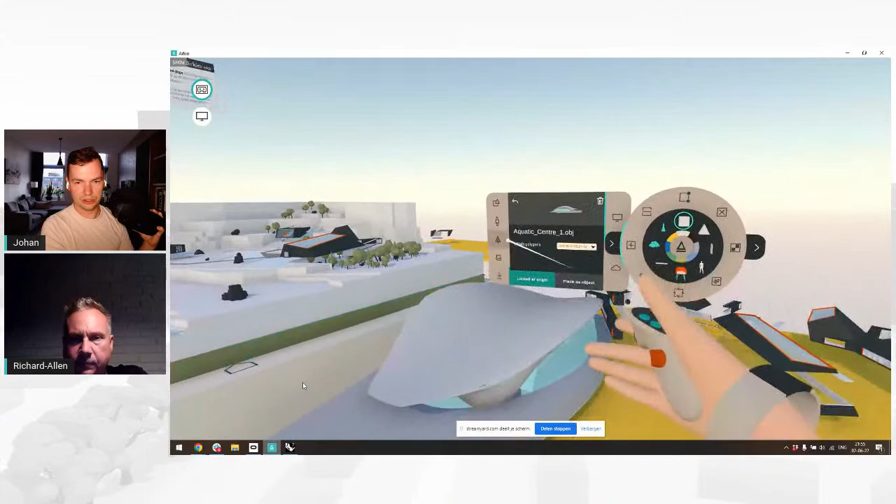This model that I brought in is already 40,000 polygons, and I believe this scene itself was around that size already. So imagine if you bring in a model from SketchUp or somewhere and download it - you have to be really picky, and make that asset as simple as you can. If you use our plugins for Rhino and Revit, we optimize the geometry - you can reduce the polygons, so the geometry gets a bit more jagged, you can see the triangles better, but it will at least reduce the geometry to keep it more within VR's limits.

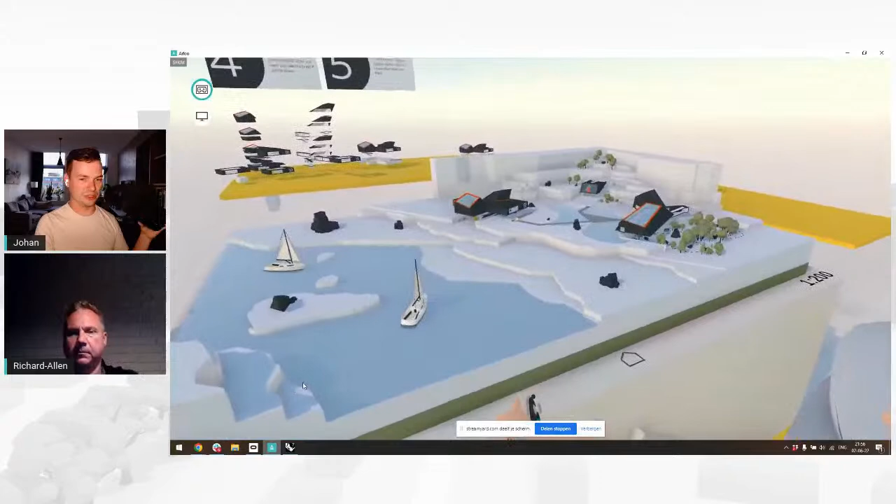For spatial, I don't know the exact limits, but they also have a limitation on the amount of textures you can use, so that's something to keep an eye on. When making something for spatial, try not to give everything a different color or texture - try to keep it nice and balanced. Like what Richard Allen did here is nice - he played with the color scheme, kept it consistent, and it looks really nice and all fitting together, and it's also good for performance.

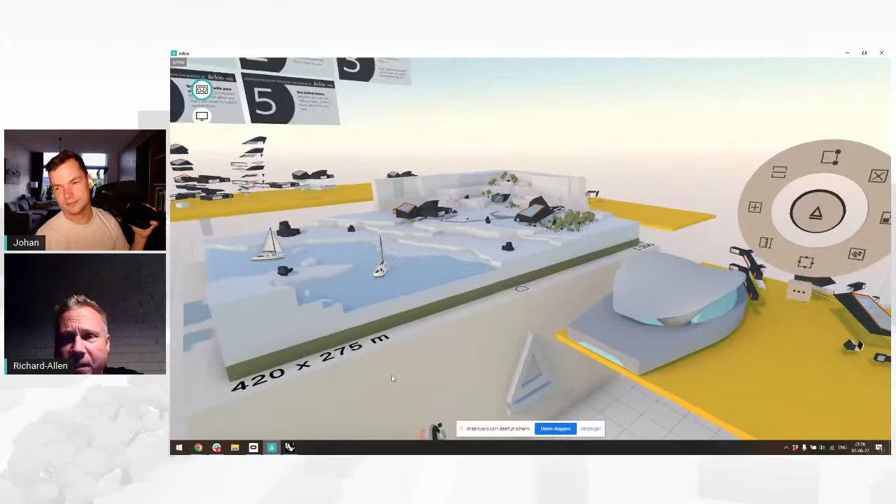Johan, do you want to speak a bit about - we've got a couple questions about the integrations, and you just talked about bringing in Revit models - do you want to talk about the Unity integration, and are there things on the roadmap about future integrations? We've got a couple questions about that as well.

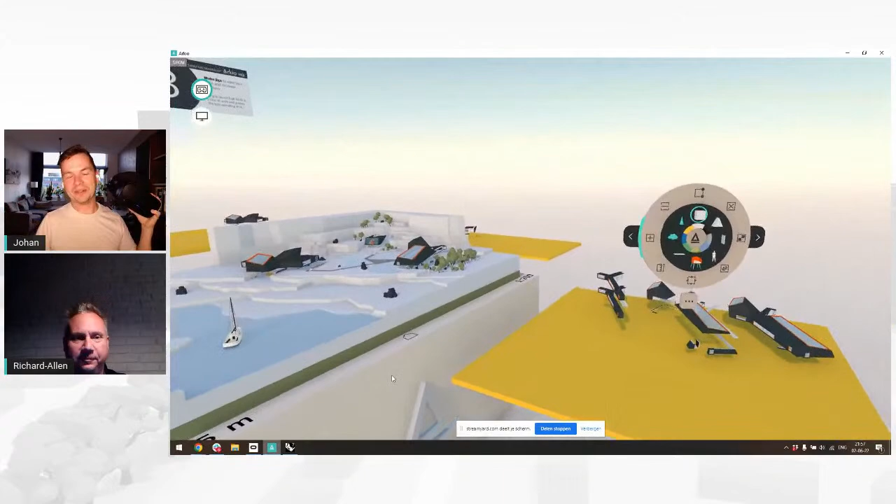On future integrations, unfortunately I cannot share too many details there, but we are looking at other things. What we're trying to achieve first is getting the basic workflow to be good, and we currently believe it's still a bit of a struggle to get models into Arkio.

Integrations with the tools themselves will keep getting better. Like we have in Unity, we have the full bidirectional integration. So you can load your Unity scene, move individual game objects, and those will update back to their new position and new size when you bring it back to Unity.

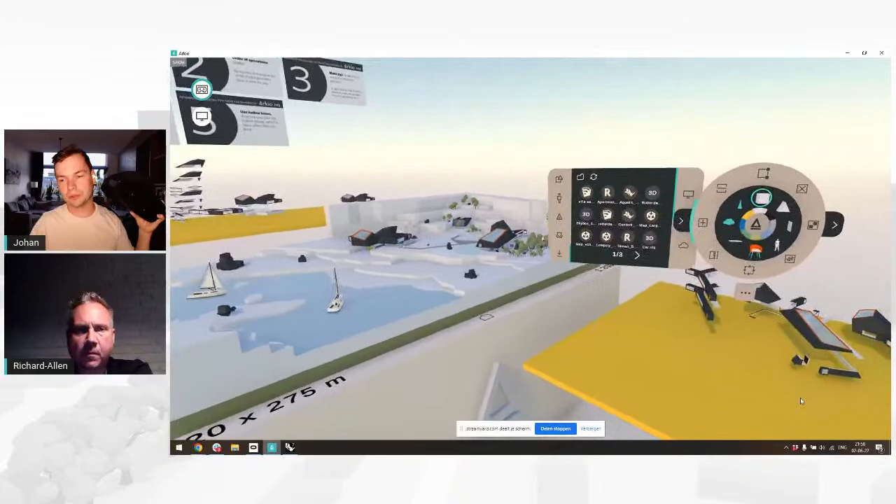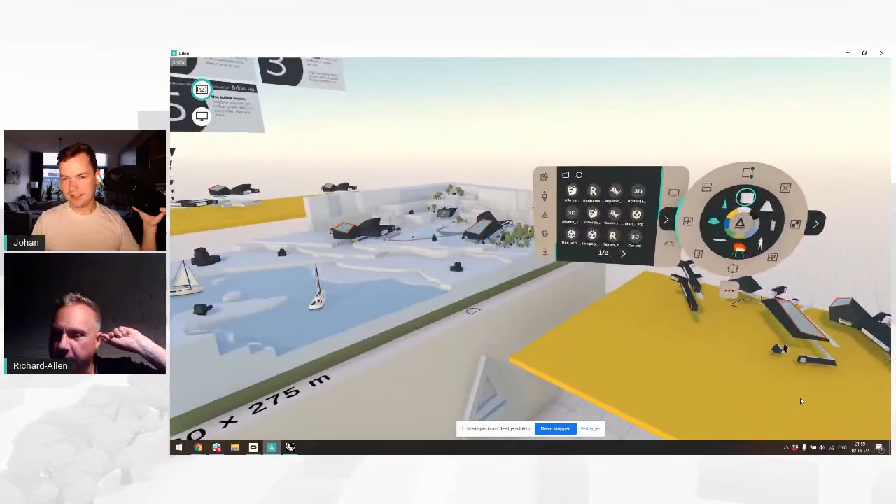We want to do something like that also with our other plugins. We have a lot of users using the Revit plugin—I think that's one of the most popular plugins right now. But we also got some requests for Archicad, Vectorworks, and some other 3D design tools. We're aware, we look at all of them, but we also follow what the most user requests are. So if you have specific requirements that would benefit the majority of users, we'd be very happy to hear you out and see if we can fit that into our roadmap in the coming months.

Speaking of roadmap, there's also a question about potential for an API for Arkio plugin development by others. Yes, that's a good question. We haven't started on something like that yet, but we've heard the question from some other developers as well. We definitely want to do something with that. If you're a Unity developer, you could already try out the integration we have now to see if you can make that run more live-linked to your Unity application. That would be one way to get familiar with what Arkio can do, but it's definitely something we need to discuss with our community going forward.

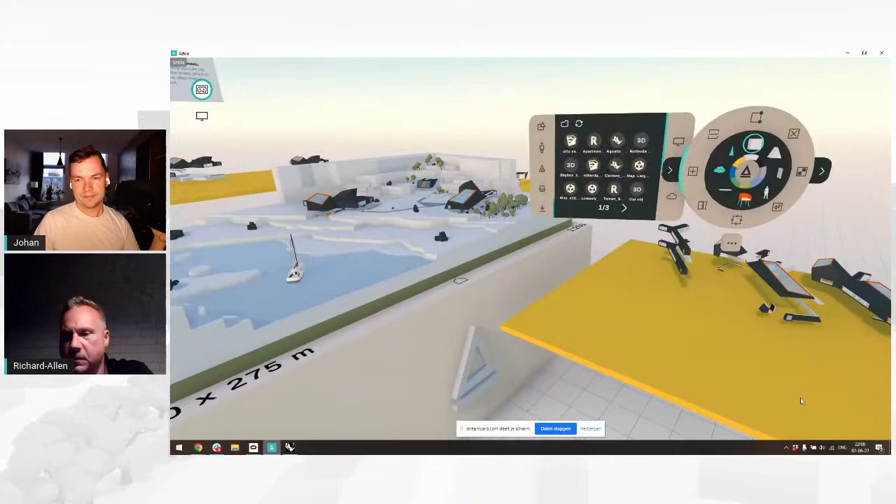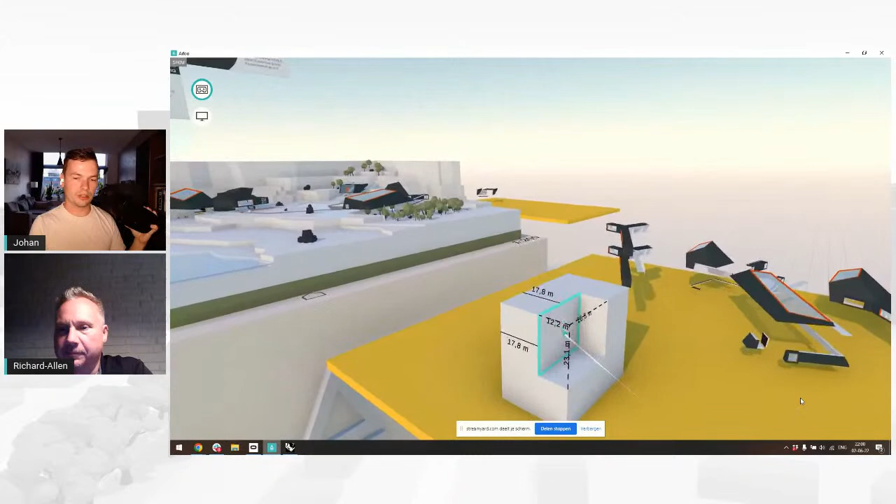The idea we have, which is maybe good to understand for what we're aiming for with Arkio, is spatial design in general. It has a lot of similarities—for architecture, stage design, game design. There are very similar applications for all forms of spatial design. When you're talking about parametric components, objects that can be adjusted and moved in real time, those kinds of examples we can also see with tools like Revit and Archicad. These parametrics and building blocks we've put in place with some of the components we added really show what Arkio will be able to do in some months from now, because it's basically a parametric editor, so we can extend that and start adding ducts, pipes, structures and things. But we need to first get the basics right and make it all more stable before we can start expanding the libraries and building more of those components.

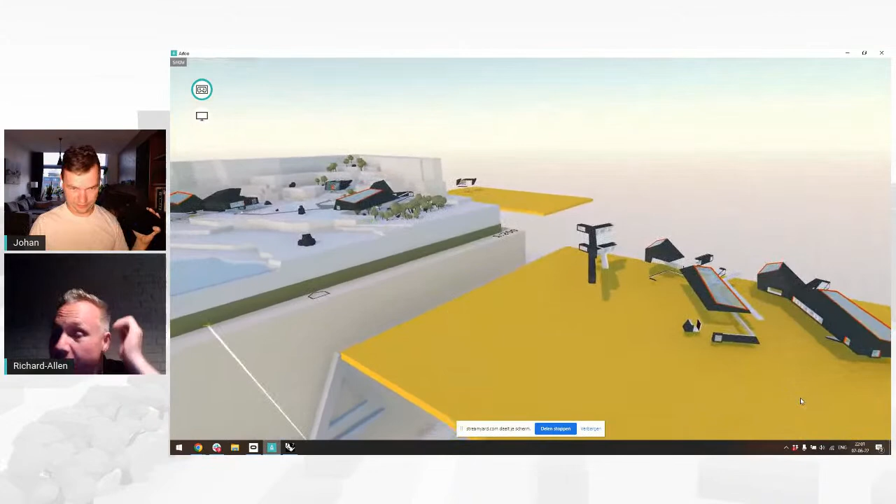Does anybody have any other questions?